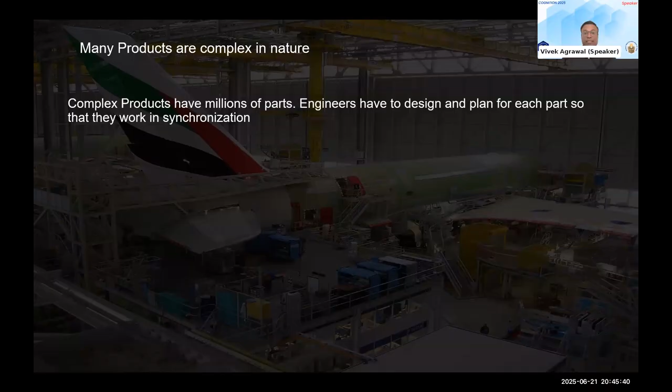A typical aircraft can have anywhere from hundreds of thousands to millions of parts. A single-aisle jet aircraft, let's say like an Airbus 320, has 340,000 parts - a huge number, and each of these parts needs to be designed. If I talk about a wide body aircraft, like a Boeing 777, it can have well over 3 million parts, and even larger 747s can have 6 million parts.

Now, this many parts make engineering utterly complex, right? And hence it is important to have a synchronized and digitized engineering plan. Some of these aircraft actually take years to be just designed so that it can actually spin out the first prototype. That's how complex engineering is.

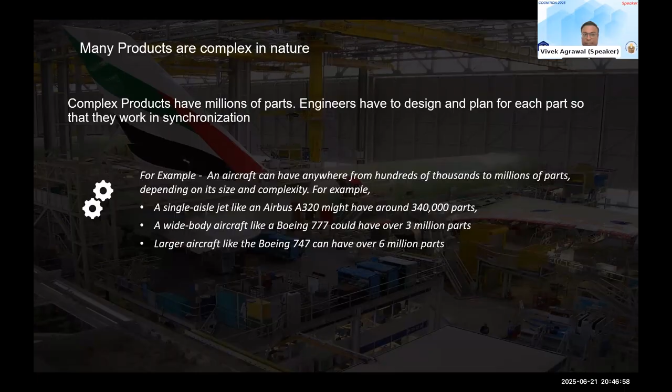Let's talk about another critical problem in engineering, and then we'll talk about how AI is solving them. Another problem in engineering is that a lot of this is driven by legacy systems. Remember, engineering firms are very old, established firms. They have legacy systems like legacy ERP, legacy designing tools, CAD tools that have to talk to each other, and sometimes it's not even possible for them to talk to each other.

Organizations are trying to upgrade their systems, but there are critical challenges. There are key questions to solve when you're actually upgrading your legacy system. Number one, is it possible to migrate my legacy data to the new system? In many cases, the answer is sadly no, because engineering designs are created, for example, on paper. We've seen clients where mechanical designs are 2D drawn on paper because they are from like 30 years back.

Will new systems be compliant to my processes? That's another question. Regulations are changing every second due to geopolitical situations - will my new systems be compatible with those processes? And the third, which is probably least talked about but in fact most influential, is how will people adapt to my new system? Are the people actually working in these organizations flexible enough to adapt to these new systems? These are some of the key questions we should solve.

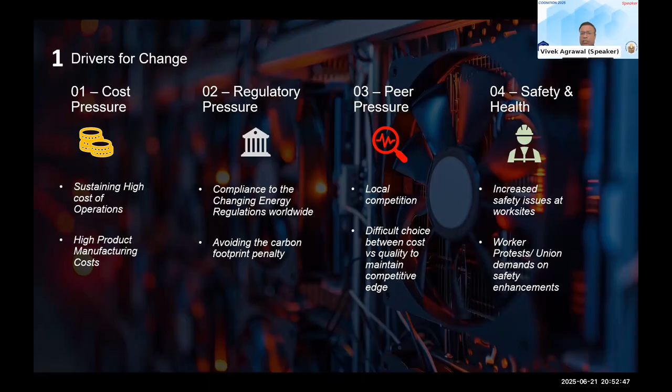Now, how did the company react to this? The company knew they had to change because they were going into loss. Number one, they did an end-to-end value chain assessment. What were the challenges across the value chain? Sales and marketing, product engineering, supply chain and procurement, manufacturing, and operations.

Sales and marketing: it is difficult to optimize sales quotes based on historical quotes. Let's say you're reaching a new customer. How do you optimize your current sales quotes based on learnings from previous quotes? Are your sales agents trained? Their sales agents were not trained to leverage the latest technology. Their sales, engineering, and manufacturing systems were not linked to each other, and this was a major problem because they couldn't have the latest engineering data to support their sales quotations.

Product engineering: they were unable to optimize their product designs based on customer feedback. They were not able to leverage existing historical designs to generate new products. This was again a problem because their product time to market was very high, and they had a very lengthy prototyping process.

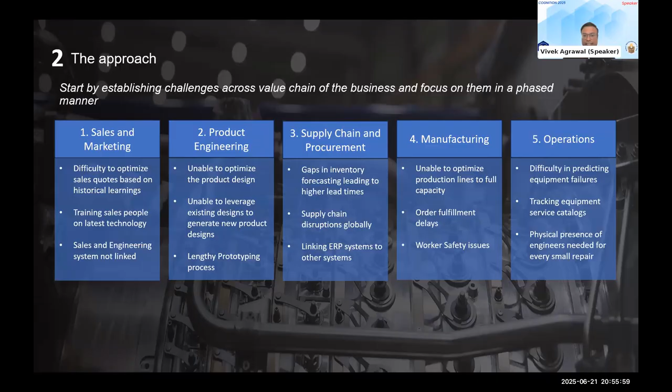Now, this is just a snapshot of the full list of problems, but it gives a gist of the magnitude of the challenge the company was facing. The next step was to look at these problems, solve them, and categorize them by people, process, and technology - which problems are people-oriented, process-oriented, and technology-oriented. Once you've sorted these problems, the process and technology problems were solved through AI. Let's look at how they were approached.

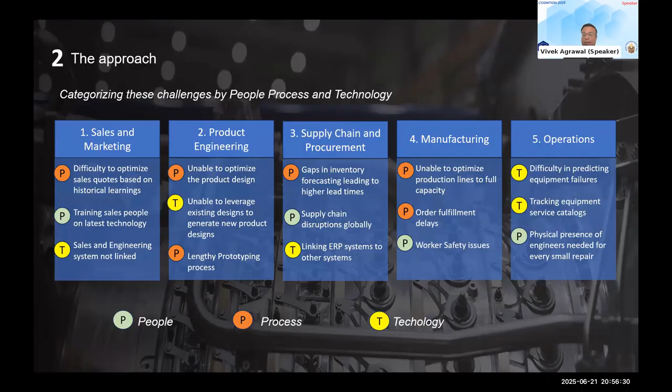Building an AI factory: the company actually built an AI factory to solve the problem. It was a center of excellence inside the company. Their motto was accumulate, simulate, and circulate. When accumulating, they were hearing from customers, internal and external - complaints, feedback, innovation sessions internally - all leading to a huge amount of use cases that they needed to solve.

Simulate: during this phase, they would score each use case in terms of priority. Once they prioritized their use cases in the AI factory, they would build a SWAT team to actually go ahead and simulate those use cases. Circulate: this is when socialization of the use case across the company happens. They would demonstrate the AI use cases to the concerned department, and monetize these use cases both internally and externally. Through this, the company was able to solve the majority of technology-related issues.

The AI factory ensured standards, which was very important because we want the same AI standards across the organization rather than leveraging different standards. And this led to monetization of not only the tools, but also reduction of cost pressure that the company was facing.

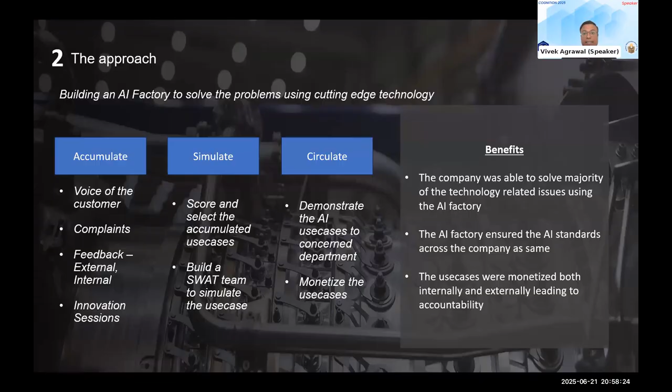Let's look at some of the examples of use cases that were solved. I'm going to play this video.

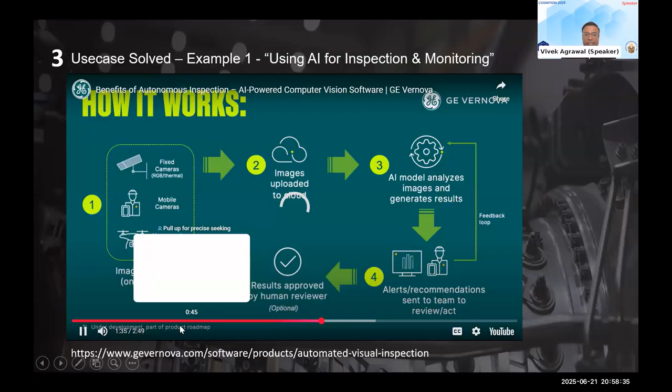Just taking a pause here. Are you able to hear the audio?

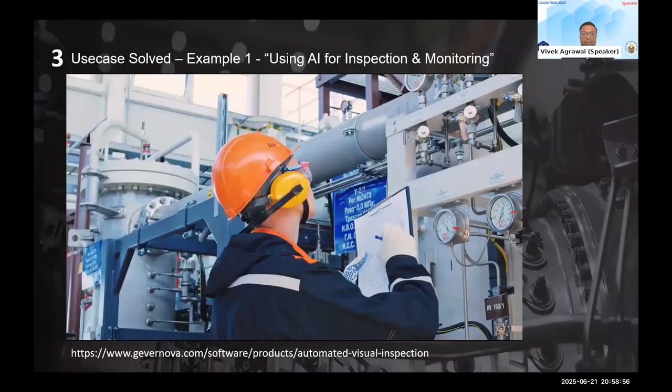Yes, Vivek. Asset inspections are necessary for safe, reliable, and compliant operations in industrial settings. Yet most operations still conduct these manually, consuming days or even weeks of valuable worker time. Manual inspections can put workers in harm's way around elevated heights, difficult to access areas, and electrically charged equipment. Plus, the growing use of wind and solar assets spread over miles makes manual inspections difficult to scale and therefore unsustainable.

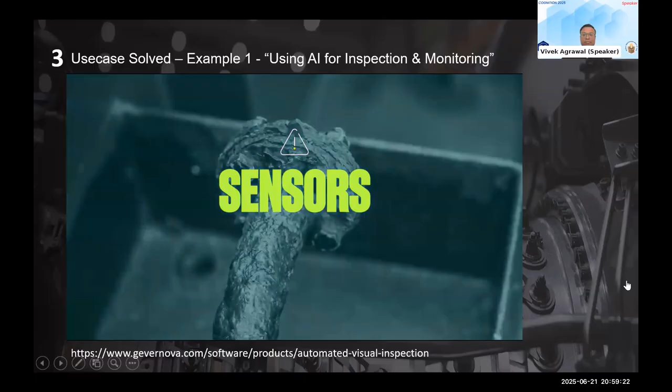While traditional alternatives like sensors are an option, they don't help with visual inspections. They can't identify surface defects such as corrosion. They fail to offer visual context. They're often expensive, and they require asset downtime for installation.

Introducing Autonomous Inspection, an AI-powered computer vision software that's part of GE Vernova's APM software suite. It helps transform the traditional inspection process. Autonomous inspection uses cameras and artificial intelligence to automate the manual inspection process. The result? Faster, safer, and more cost-effective inspections.

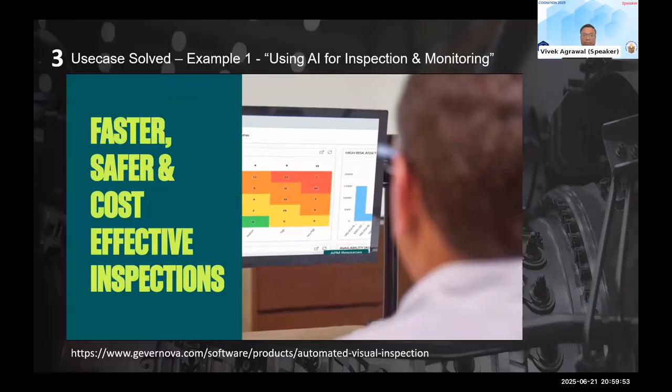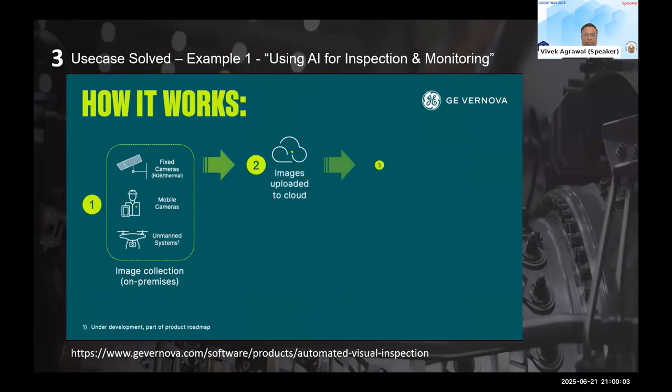So how does this work? Images of assets are captured by fixed or mobile cameras and sent to the cloud to be analyzed by Autonomous Inspection's specialized AI machine learning models. AI findings can directly trigger alerts or recommendations if an anomaly is detected, or the findings can go to a team member for prior approval.

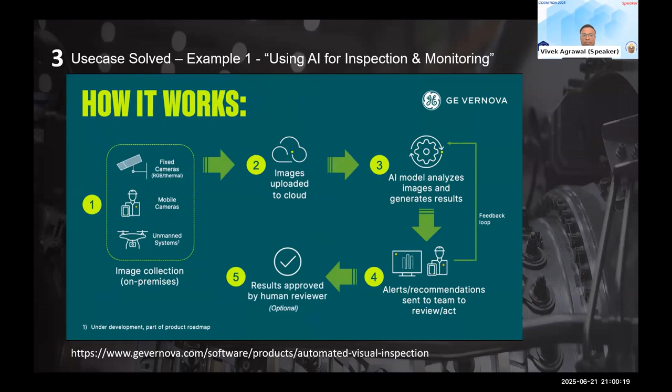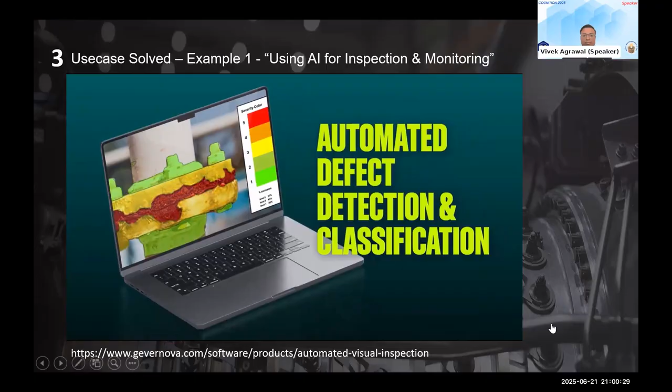Packed with powerful AI features to automate inspection workflows, Autonomous Inspection can automatically identify assets like pressure gauges and pull readings from them, detect defects like corrosion, classify them based on severity levels, trigger alerts, and integrate time series data and insights with select GE Vernova APM applications. It also automates image data management for later reference and analysis.

With Autonomous Inspection, switch from spending days or weeks performing manual inspections to automating inspections in mere minutes to hours, saving costs and ensuring better asset uptime. From hazardous inspections or unnecessary inspection-related travel to boosting worker safety and productivity. From poor visual context to rich visual insights, now available within your GE Vernova APM. Enable faster detection and response, improved worker productivity and safety, and better asset and operational outcomes with valuable visual insights. Don't just improve inspections, transform them with AI-powered Autonomous Inspection.

Well, okay, I'll pause this here. That's going to the end. From GE Vernova.

So this is how they did it. They created a digital twin using sensors of all their assets, and they captured data from all these sensors and trained models to use that data to perform, let's say, detect corrosion, thermal profiling, and push these results to dashboards.

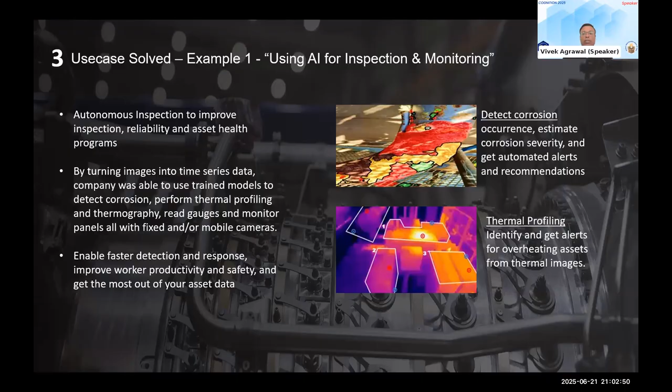Now this was extremely important for the client and the client end customers. During asset monitoring, a lot of time is spent on actually identifying and fixing the problem. This was drastically reduced because the time to detect or predict a failure was significantly reduced. This was a real world example which really impacted across Europe and Asia, how the client and their end customers reduced their inspection times using AI.

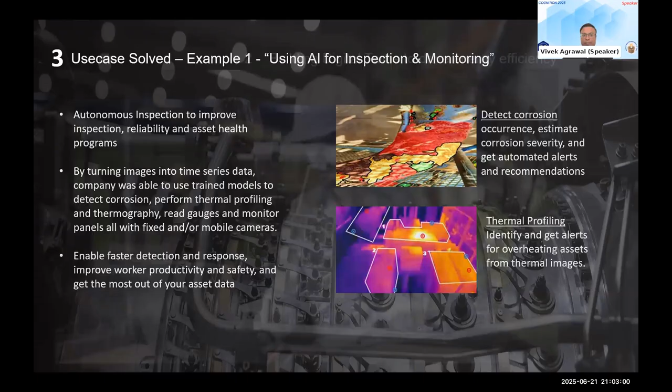Let's talk about another example. This example is again very famous globally because this is about building digital twins to drive energy efficiency. Some of you may not be familiar with digital twins. I can talk about digital twins later, but let's see this video first.

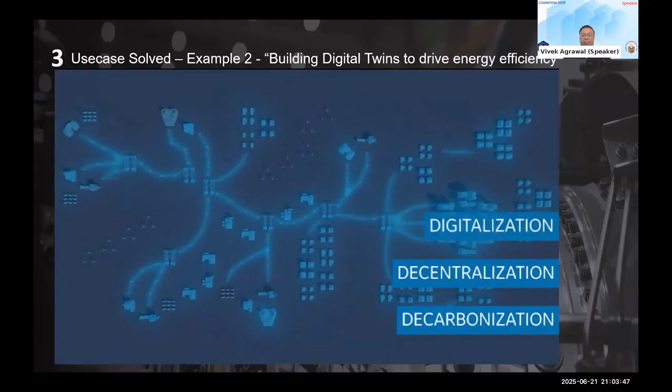The electricity industry is entering an unprecedented time of disruption and change. Decarbonization is driving the adoption of decentralized renewable energy, which in turn brings complexity to the grid with a multidirectional flow of energy and an increasing number of connected devices. Utilities are looking to digitalization to increase innovation, reduce cost, and manage risk.

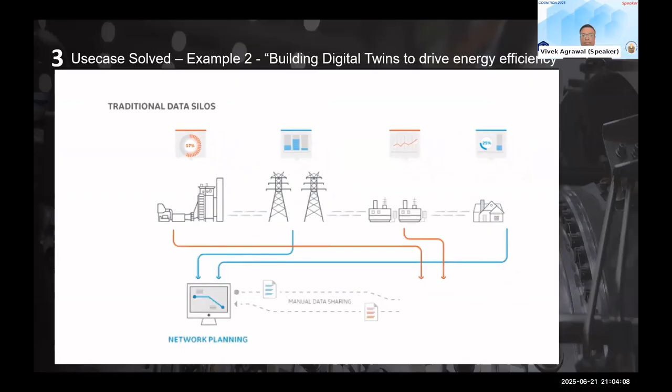Traditionally, electric utilities have operated in siloed organizations where each department, for example network design, has a separate and specific view of the grid. In order to meet the challenges of the modern grid, utilities need one comprehensive view. This approach reduces inefficient business processes and eliminates manual data sharing.

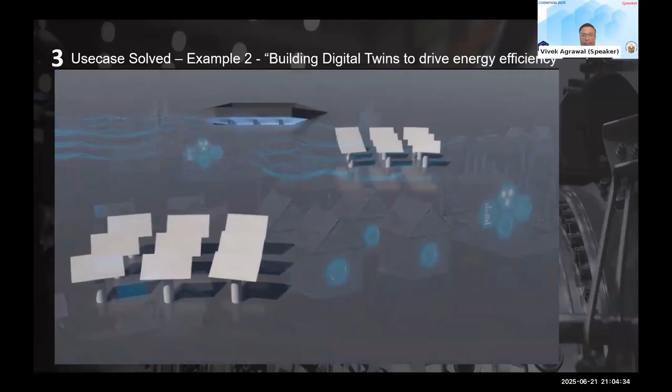And as a result, utilities can harness the benefits of digitalization and provide more innovative services. The Network Digital Twin from GE provides a comprehensive view of the grid combining GIS, EMS, and ADMS, all powerfully shared across the utility. The network digital twin is software that connects physical systems on the grid with the capabilities of the digital world. It is the digitized version of the living organism that the modern grid has become.

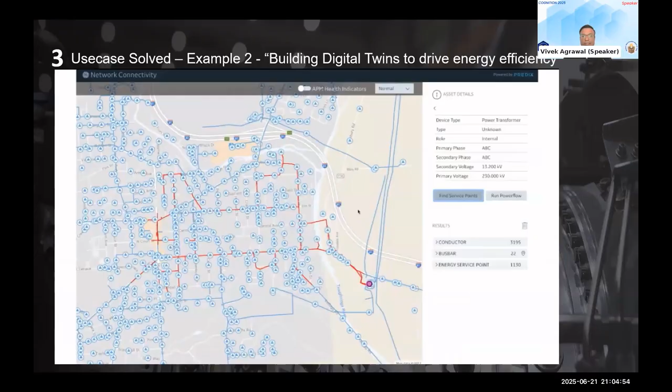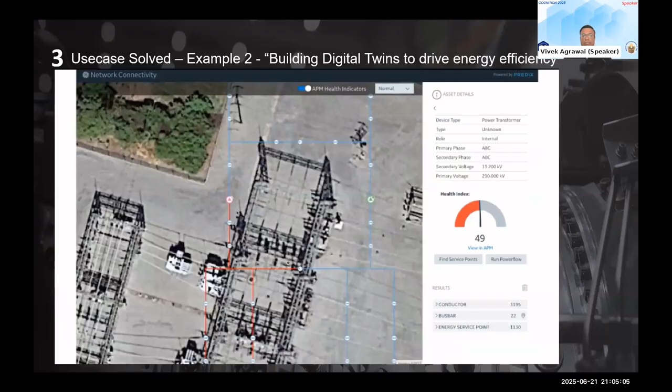Network digital twin accumulates data over time about the structure and location of assets, their operation, and the environment in which they operate. On top of that asset data, valuable intelligence is developed using analytics, physics, and continuous machine learning. Past and present asset performance and operation are stored as part of the digital twin and can be used to predict future outcomes. With the network digital twin, multiple data sources can be fully leveraged to simulate and predict how the grid can be optimized.

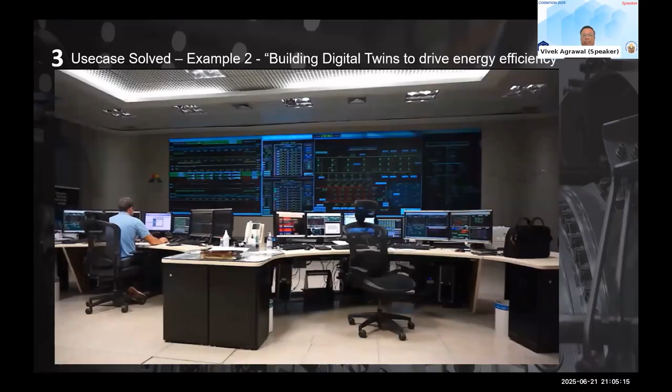This puts an end to hunches and guesswork. Field crews can be dispatched to the right location with the right information in order to rapidly fix what's broken and optimize network reliability. Asset maintenance moves from reactive to predictive. And utilities gain a forward-looking, fact-based view into where they need to make capital investments in order to remain resilient, increase efficiency, and provide better customer service.

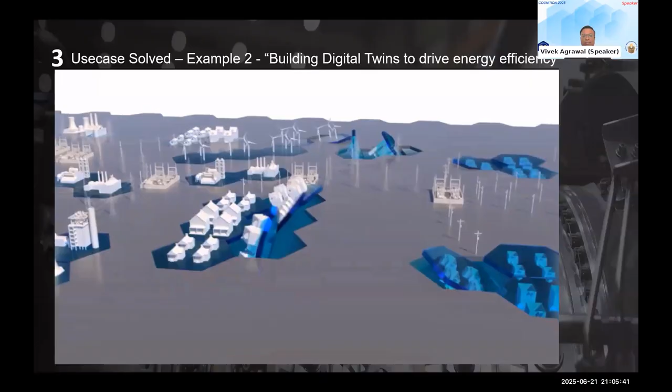Network Digital Twin from GE breaks through organizational data silos to digitally transform your grid.

Okay, so what was this use case all about? This use case was about how do we actually drive energy efficiency using digital twins.

What is actually a digital twin? A digital twin is a simulation of a physical product in a digital world. It can be anything - your pen can have a digital avatar in your computer. That's digital, but does that mean it's a digital twin? Having a digital avatar that reacts to a change in a physical avatar is what is a digital twin. For example, if you are holding your pen and the digital avatar shows the pressure points where you're holding the pen, that becomes a digital twin.

Now, having a digital twin has several advantages. Let's talk about a process digital twin. In manufacturing, process digital twins let you model manufacturing scenarios. Plant operators can ensure they're looking at things virtually to simulate quality, cost, volume objectives, and not have to do trial and error with the actual physical product. So it's a highly efficient way of improving manufacturing quality.

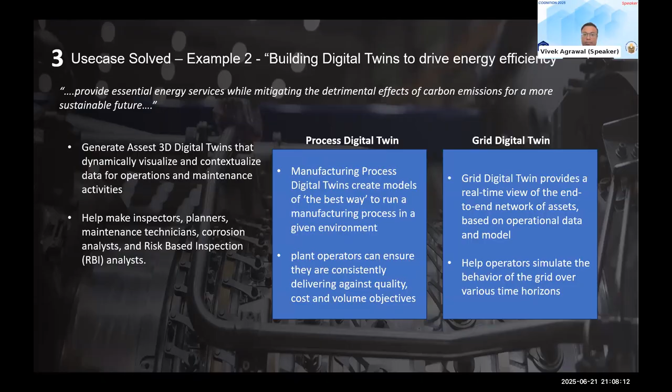Now that we've seen two examples in the energy sector, and I know we have 10 minutes, let's talk about another great example from an aerospace major - Airbus. It's no secret, it's all publicly available information. This is again about digital twins and how Airbus is leveraging them. In fact, it's a pioneer in leveraging AI and digital twin across its value chain to develop quality aircraft, which its competitors are still trying to replicate.

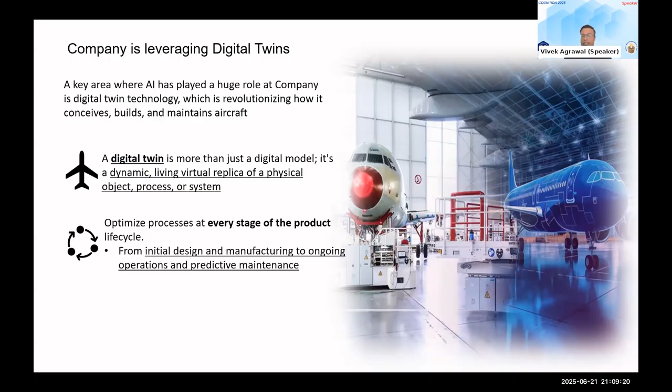So I explained earlier, a digital twin is more than just a digital model. It's a dynamic, living virtual replica of your physical object. You optimize processes at every step of the product lifecycle - from initial design, manufacturing, and ongoing operations and maintenance. So it is at every stage.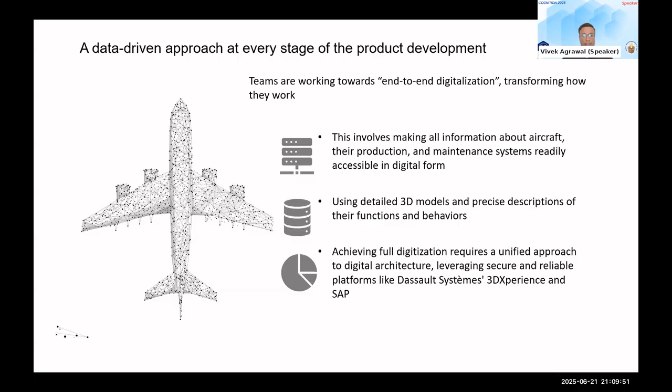The company got teams working end to end in transforming how digital twin should work at each step. Number one, making information about aircraft and their production readily available in some digital form, because the basis of digital form is digital data. Second, 3D models - this is the core of the digital twin. You need strong 3D models that represent your aircraft and each component of the aircraft. And at the end, you need to tie all these things together with a unified approach - a digital architecture.

Now, platforms like 3DXperience provided by Dassault Systèmes and SAP were critical to achieve this goal.

Now, how did this happen? You leverage smart simulation tools and robots across the value chain that can predict how designs will perform under various conditions - simulating weather changes, a rain, a thunderstorm, a sandstorm for working in deserts, a snowstorm. So all these weather changes and how they impact the wings, engines, flaps, and fuselage of the aircraft were all simulated, and you could actually see the strength of materials and assess, let's say, whether you need a better composite to design a fuselage versus the current material used. So this is where AI actually helped Airbus enhance its aircraft designs.

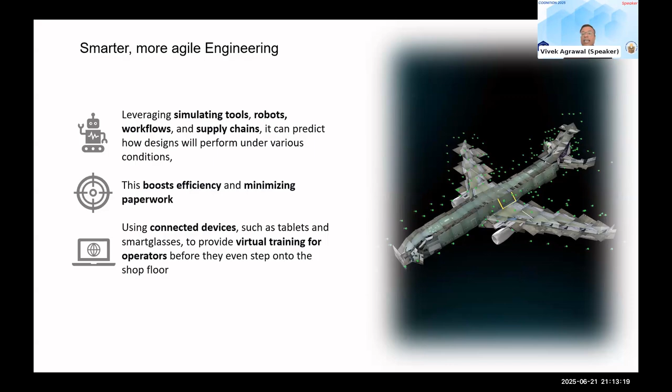I had this video - I know we're short on time, but I can paste the link. This is a very long video about Airbus, and you can watch it. It's a very nice video which talks about how Airbus has partnered with Dassault Systèmes and some of the other industry leaders to build a partnership for developing better aircraft. So this is a great example and provides some insights on that.